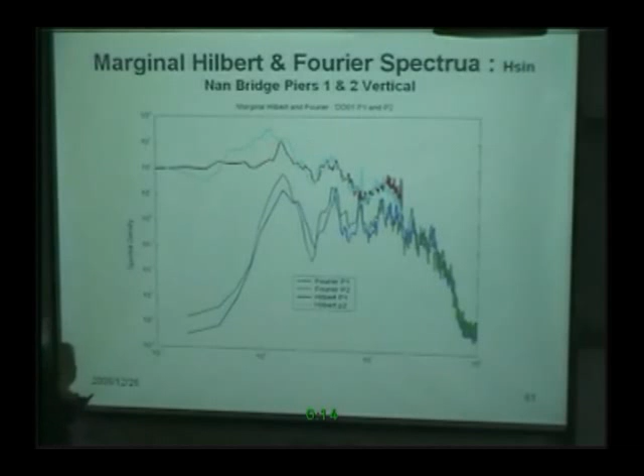And that means the stiffness of this pile is almost half of that, because 16 over 9, and 16 over 8 is an exact half. So this has almost lost half of its stiffness. Now, this of course is only one load, and we analyze all the different loads and make an average.

These are all different trucks passing by pile number 2, and these are all pile number 1. Now you will see that pile number 2 and pile number 1 are different, even in the mean. At the higher frequency the frequency is the same, but the lower frequency is different. Not only that, we can also calculate the mean of pile number 3 and pile number 4. The average of pile number 3 is over here. It's identical to pile number 1.

But pile number 2 sets really aside and is very different from pile number 1, 3, and 4. And this is averaged over many piles. If we plot it like this, say pile number 3 and pile number 4, you can see the difference. Their peaks almost line up. I have staggered the magnitude.

I have plotted this a little bit lower, and the average of all this is actually this spectrum, and this is the average. This is the mean of 3 and 4. This is pile number 1, and this is pile number 2. So the frequency shift, the frequency change is clear.

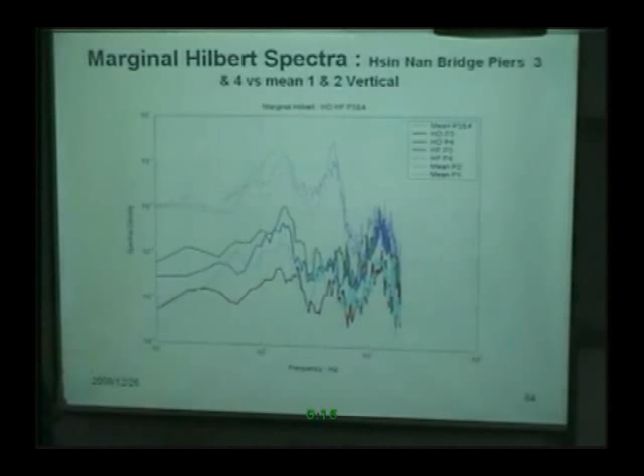And based on structural vibration theory, we know that half of its stiffness has already been lost. So it seems that the HHT can make a difference in bridge safety monitoring, and we should not rely on frequency downshift alone to determine damage, because this is very insensitive.

Nonlinear characteristics revealed under heavy load versus light load are critical. I strongly recommend that we look at this as a way to indicate whether the structure is or is not damaged. A comparison between damaged and undamaged spans is critical. For bridges, this is easy, but for buildings, it's not that easy, because a building has a lot of redundancy.

You take any building, you have so many different columns, so many different beams, and if one of the beams is damaged and you're further away from that beam, you will never see any difference at all. So, by comparison, a bridge is a much simpler, easier problem.

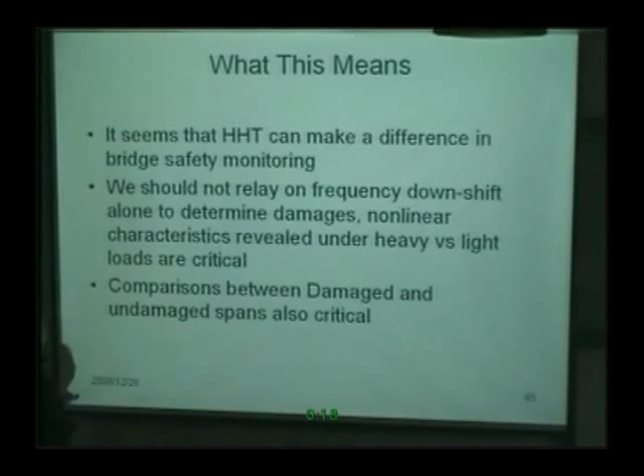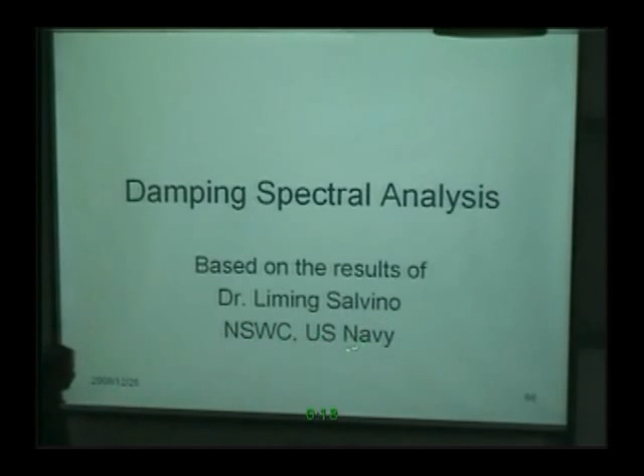Now, then we look at the damping spectral analysis. This is based on the work by my colleague Liming Salvino at the Naval Surface Warfare Center, which belongs to the U.S. Navy. What she did is try to extract the damping characteristic of a structure. The damping characteristic of the structure actually reflects the characteristic of the structure.

But in this particular application, the damping is even more important, because what they were studying was the damping of the submarine. If you have a submarine and the submarine gets hit, you want the shaking to stop right away. If the shock continues, it may damage your equipment, damage your machinery, and also cause harm to personnel.

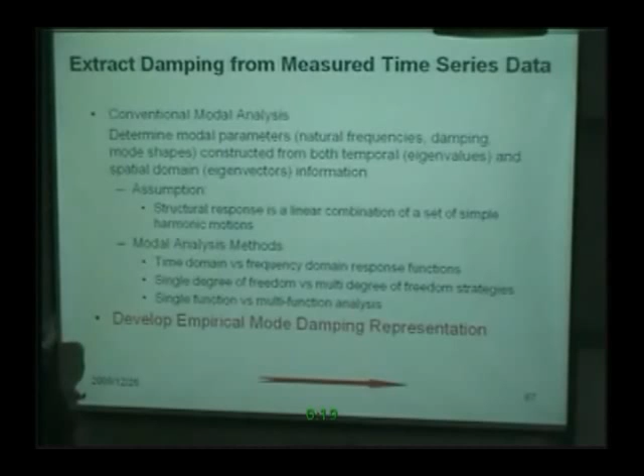So, in the past, they were using modal analysis. Modal analysis is time domain versus frequency domain, single degree of freedom, single function, and all that, linear assumption, everything. So the damping actually is computed from this mode. Each mode you can write as A times e^(iωt). But this A is a function of time. The oscillation is a function of time.

You write this A as C e^(-γt). See, this γ is actually what measures the damping. If you take the derivative of this, you find that γ is actually defined as the damping rate. That's the rate of amplitude decrease, the time derivative of amplitude over amplitude. It's the gamma. If you write out the second order ordinary differential equation to describe damping, the gamma is the damping ratio.

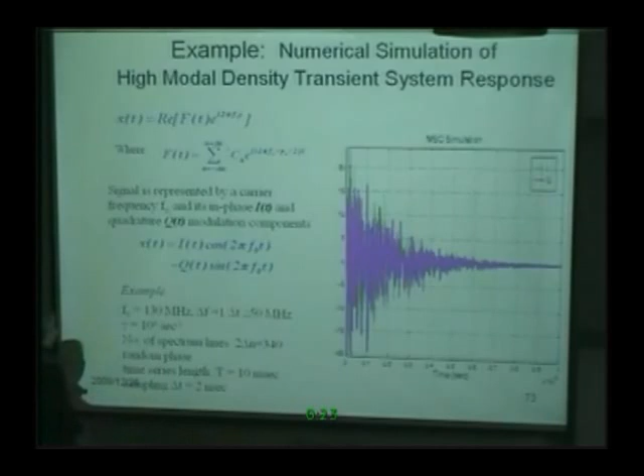Then she did the frequency change. Even with frequency change, she can again determine the damping as a function of frequency. So then finally, she did one more thing. That is assuming a random summation, a random damping. Then for a given damping characteristic, gamma, she can again get the damping characteristic. All of these are numerical computation. Then she went on and carried out a

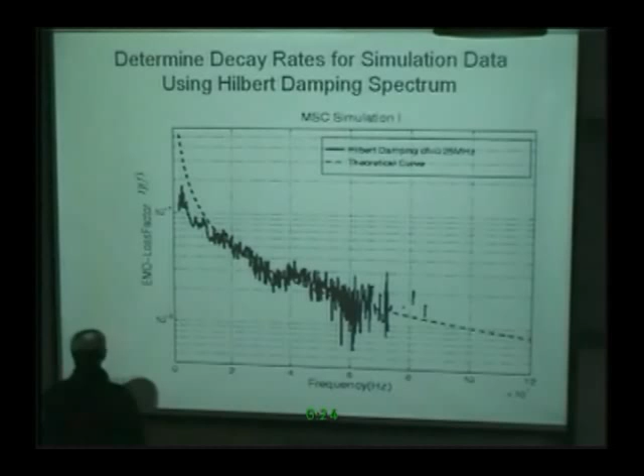test. A test is that you have a theoretical curve of damping, and you have the data. Then you use Hilbert transformation, and immediately you plot the damping as function of frequency, just one shot. Yeah, and that made her very happy. So she actually started to do this particular frame. This is an experiment frame, and this frame is interesting.

Actually, this frame is a simulation of a submarine stiffener. A submarine is a tube. Inside the submarine, you have a structure stiffened to keep the submarine hull from collapsing. And in the submarine, you want the body to be light so that you can put payload. So all these members are actually hollow. It's not solid, it's hollow. And to make the submarine damping characteristic good, so you can damp very fast, they try all kinds of ways to make the damping characteristic high.

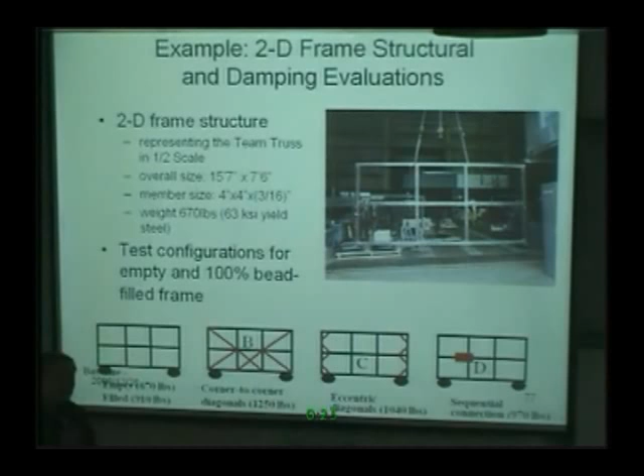And what they found is that if you use very lightweight plastic beads and put them in the hollow section of the frame, that caused the vibration to stop right away. Yeah, and the weight is minimum, and the effect is very strong. So they are trying to study the structure for two reasons. One is what kind of beads, what density of beads and how many beads you put in can increase your damping. Another one is, when you put a frame in here, what kind of bracing you have in there to make the structure stronger. So these are the two things that they want to find out.

In the past, they used modal analysis. Modal analysis means mode, because it's a linear assumption. So they tried to vibrate this structure with one single frequency and measure the response. And then you move to another frequency, you shake it, you get another damping. So finally you get a whole curve. And to do that, each vibration takes hours of preparation. To cover the whole range of frequency usually takes a week or so to finish one configuration. And then you have to change the bracing from this to this to this and to nothing, and change the different filling. Each frame will take months to finish.

What they did with HHT is very simple. This is the different kind of loading, and they decided to use the impact load. In the past, as I say, they used periodic oscillation because it's mode. But periodic oscillation has another shortcoming: in real operation, the structure is not subject to oscillatory load. Nobody will give you a force like a sine wave. The force a submarine usually receives is from a depth charge. The depth charge is the one the submarine feared the most. You throw in a bomb, it explodes underwater, and the shock wave is so strong it will actually shatter the submarine. So the depth charge is actually an impact load.

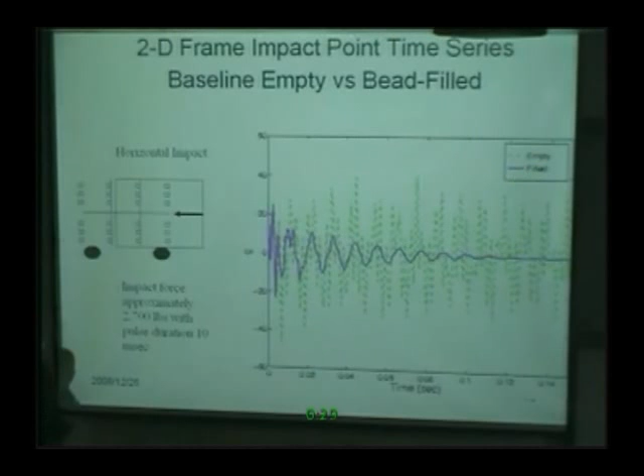and here are different kinds of bracing: the baseline bracing, the corner bracing, and the eccentric bracing. So you see the corner bracing. Which one is corner bracing? Let's see the corner bracing.

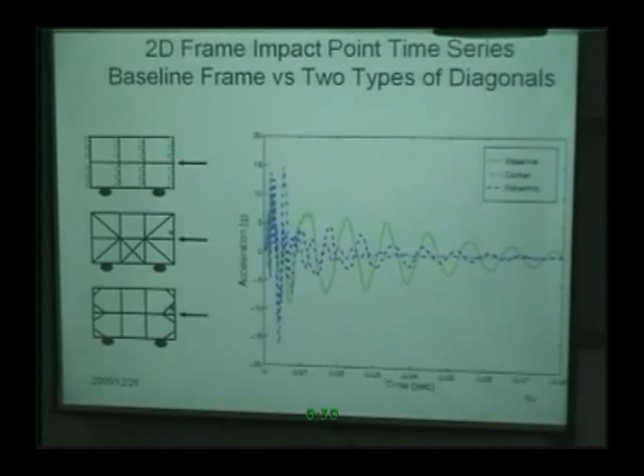So after this test, then you can plot up the Hilbert spectrum, and you can see the frequency, the energy as function of time. This is baseline. This is baseline with some bracing, and you can do all kinds of this Hilbert spectrum for different kinds of structure configuration, corner to corner, and eccentric bracing. These are function of time. This is frequency.

Then you summarize this. The previous Hilbert spectrum is just energy, but we're not looking for energy. We're looking for amplitude, A dot over A. If you plot A dot over A, what you find is this. If you spend weeks to make individual measurements, you get these dots. This is from modal analysis. You oscillate at one frequency, you get the damping at that frequency. Oscillate another frequency, one by one frequency.

This is just with one bang. You take the structure, you just bang once. It's oscillating because its impact load is a delta function. A delta function consists of almost all frequencies. And using the Hilbert transformation, you immediately get this damping characteristic. This is the damping characteristic with the filled beam, where you fill this beam with plastic.

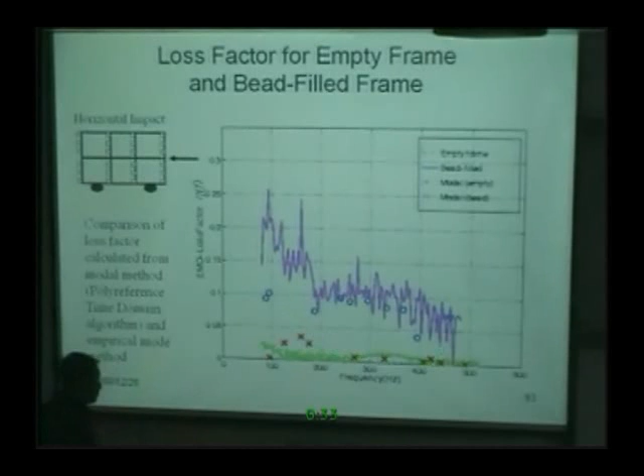So this made the Navy so happy. They actually got a patent on this test. So in the future, they will just get the structure to bang once, they get this curve, and bang another time, get another curve, and eventually they get the whole answer, instead of spending days on each individual oscillation.

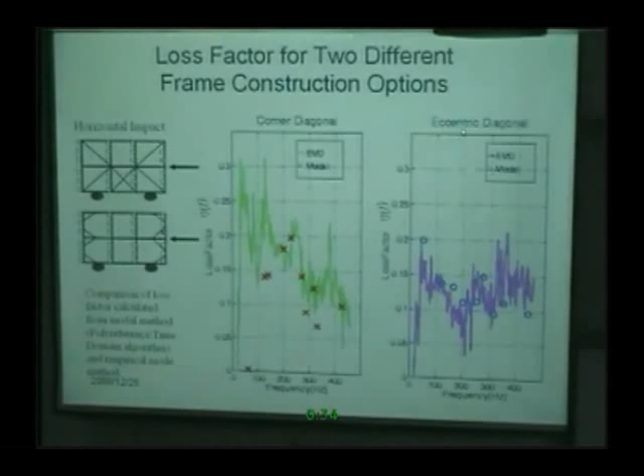And with different bracing, this is the Hilbert analysis. These are the individual ones. You can compare. This is eccentric diagonal. This is corner bracing. The individual crosses really agree very well with the Hilbert analysis. So Hilbert analysis saves so much analysis time, so much testing time. And again here, they agree so well.

I have not seen this published in any literature, but I was told this is not classified, so I talk about it. But this is a real case where the Navy feels so happy and is using this so effectively. The engineer, because of this, got a lot of extra research money to do her work.

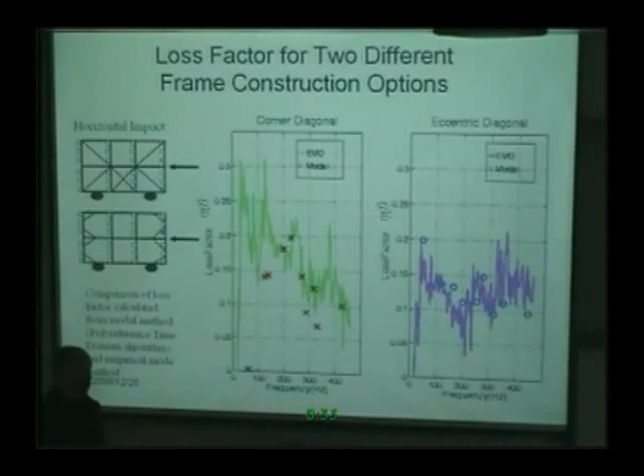So the comparison is modal analysis versus HHT. Fourier modal analysis uses a combination of sine and cosine waves to represent a complicated waveform. The oscillation is a waveform, so using sine and cosine, you have to use many terms. Damping is assessed at specific frequencies, depending on the geometry of the test specimen. Different structures have different resonance modes. So if you want to find out which mode you should avoid, you have to test many times, and you're lucky if you hit the particular frequency.

The most critical thing is this works well only for linear simple systems. But for Hilbert, we use a simple intrinsic mode function, which is AM and FM, each corresponding to a different carrier frequency, and the AM immediately gives you the amplitude. So this is designed almost perfectly for damping, and damping assessment over a continuous range of frequencies. You bang once, you get all the frequencies that you need.

This is especially important if the damping varies with different frequency. For example, resonance. The linearity condition is not imposed. They can be used to measure shock wave, especially when damping is dependent on both time and frequency. Shock is what they really want.

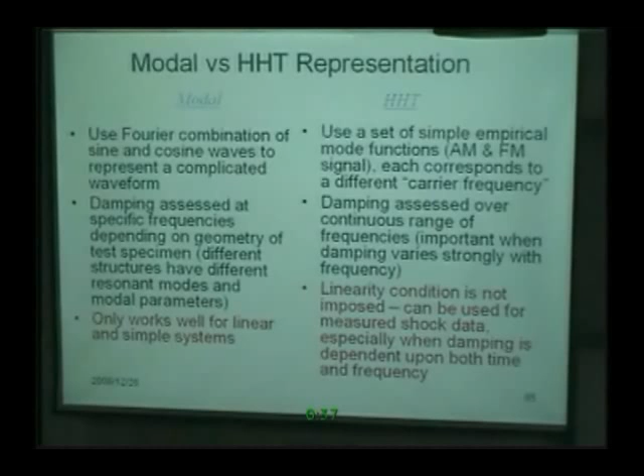Okay. So the summary is that this HHT method gives a detailed local structure response behavior, and it's a unique, valid, and important approach to shock data analysis. This is our summary. Advantage of this method is effective use of full complicated data in time-frequency combination. And the method also fully explores the physical significance of the IMF component, and may offer new physical insight. And this is especially for the shock impact and for identifying important structural failure mechanisms of large and complicated structures.

Our work of time-frequency dependent damping is the only method that's able to extract damping value from experimental study of complex systems such as underwater shock testing time series, and express damping ratio as a function of both frequency and time. And this actually solves a pretty big problem for the Navy.

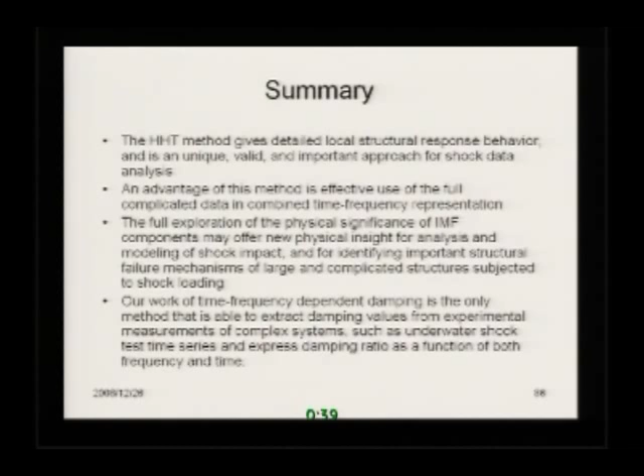The Naval Surface Warfare Center means they're interested in warfare. This is also true not only for submarines but also for surface vessels. If a surface vessel gets hit by a bomb or by a gun, the ship oscillates, vibrates too, and they want the vibration to be as minimum as possible. So all kinds of naval vessels are subject to these tests, and this now may become their standard test that the Navy uses.

Okay, so the damping spectrum analysis is important for non-destructive examination experiments. Damping is only limited to stable structure vibration. When you talk about damping, especially the formula that you saw, the damping A dot over A, that means amplitude change is squared. If the value is positive or negative, doesn't matter, it's squared, all becomes positive numbers. Now when the structure is unstable, there might be negative damping. If the oscillation actually picks up and gets bigger and bigger, this does not work.

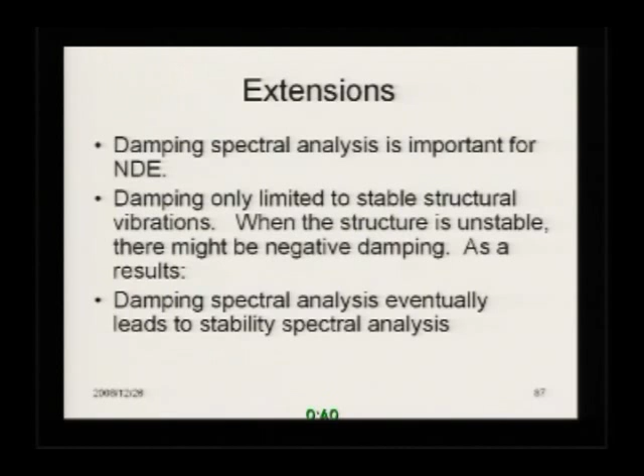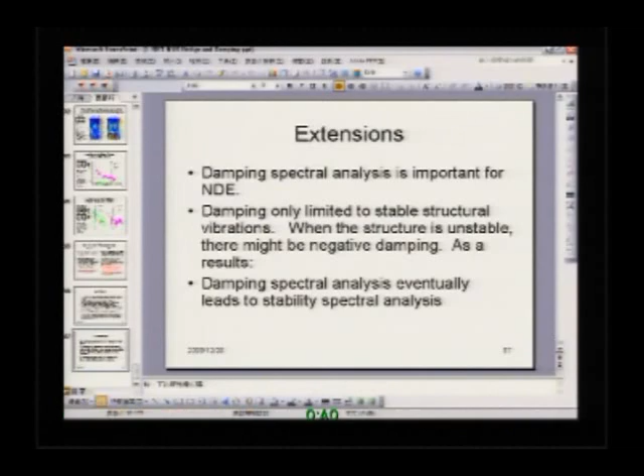So the damping spectral analysis eventually leads to stability spectral analysis. The stability is very different from simply damping. Now next, I'm going to talk about stability. Application. Stability.

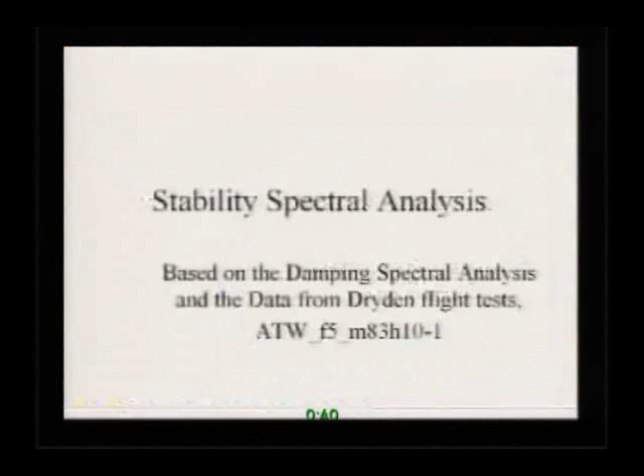Okay. After the Navy people did the analysis for the submarine and the surface vessel, I was asked by NASA to visit the NASA center in the Mojave Desert, Dryden Flight Center. Most people have seen this place as a test place for new cars. So this whole area is a desert.

It's a lake bed. In the raining season, you cannot see the end of the lake, but you can walk all the way across because the deepest the water is about 2 feet. It's so flat that the water just fills the whole place, miles on end. But when it's dry, the lake bed is so flat that you can drive anywhere without any problem. So most of the airplane tests and vehicle tests are conducted here because there's no obstruction. You can keep driving, and the lake bed is so hard, so it's a perfect place for that.

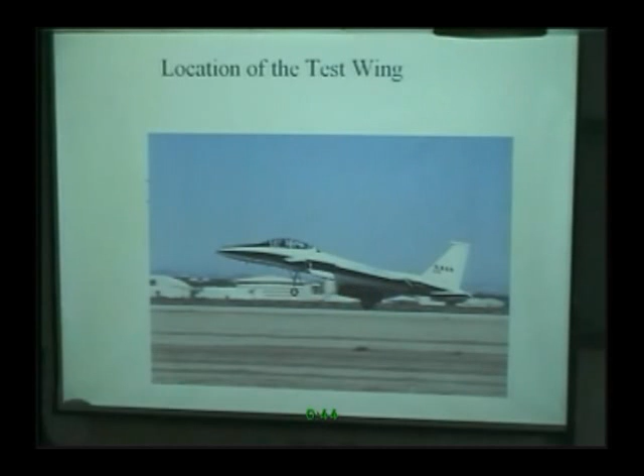So for this particular test, they go to Dryden, because Dryden doesn't have any wind tunnel, but Dryden has a fleet of airplanes. Whatever we want to test, we just hook it on the airplane, let the airplane fly, and test under flying conditions. What is the specimen here? This is the fuselage of the aircraft. This black box contains all the equipment, instruments. And the test specimen is here. It's this little thing, about 3 feet wide. It's an airplane wing.

Why do you want to test this airplane wing? This airplane wing is supposedly for the next generation of aircraft. The next generation of aircraft has a special requirement, a special concept. That is, in our present aircraft, the wings are designed to be rigid. So after takeoff, the wing does not deform. Of course, it flutters, but it will not deform.

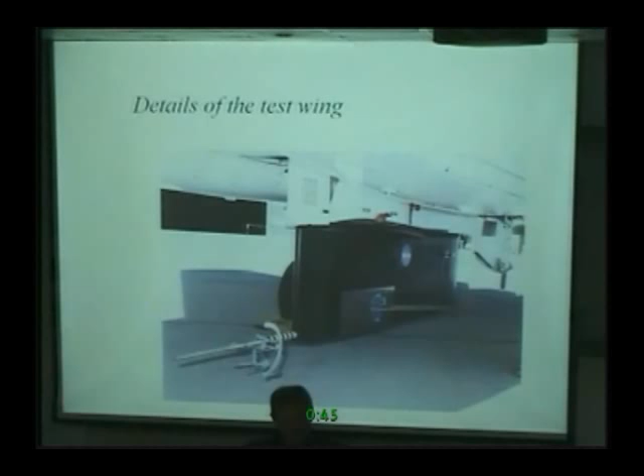This wing is designed so soft, so flexible. When the aircraft flies at top speed, the wing actually deforms, swings back. And by swinging back, it actually improves the performance of the wing. And also, by design, the wing is so flexible, so it's lighter, so the total weight of the aircraft is less. So by having less weight and better performance, they thought that would be a perfect solution to design the next

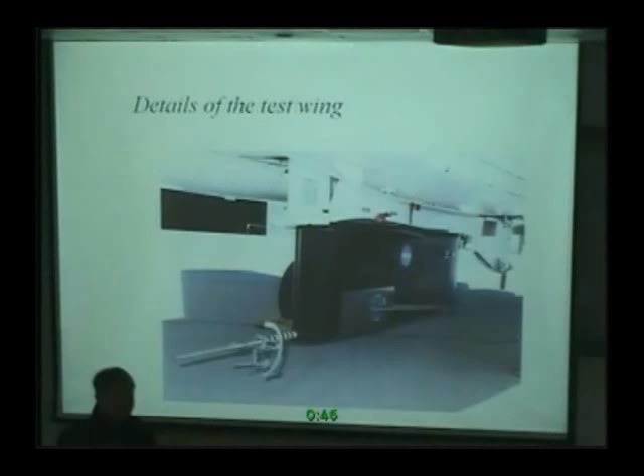generation of high-performance aircraft. But the problem is that if I design the wing so flexible, will the wing actually be shattered when you fly? So they want to test that. And this experiment was going on for 5 years when I first got there. The first flights are at different speeds, and the final experiment was to test the safety envelope of this. They will fly until it shatters.

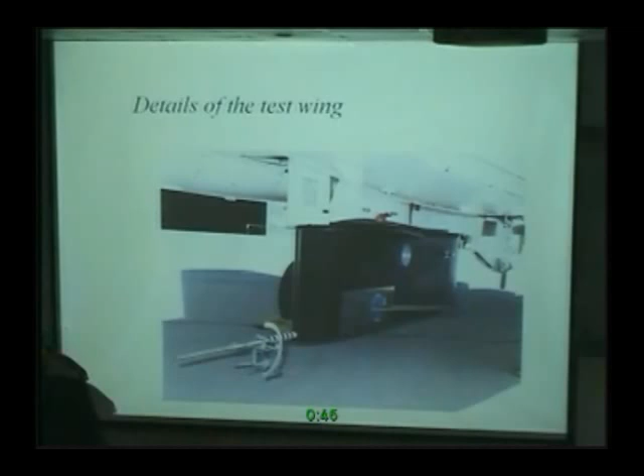Okay. Let me see whether the video doesn't work. Let me see if it's because you don't have the video. Huh? Do you have the video? Yes, next time you repeat this. Okay. The video is nice to watch. So I want to. You sure you have the video?

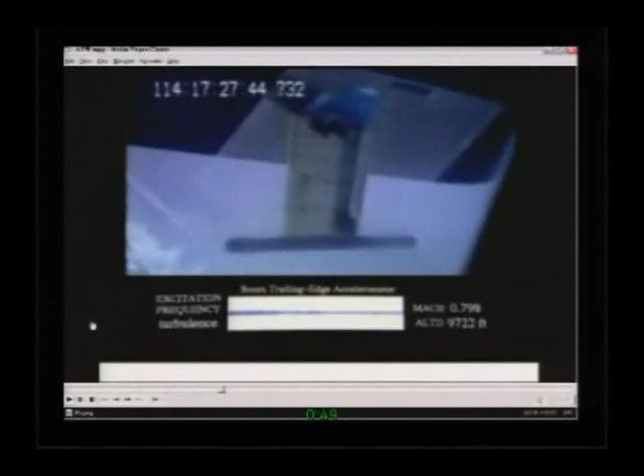Okay, this is the wing, this is the Mach number, this is the altitude, and this actually says you are clear to accelerate. Accelerate to 85 means the Mach number to 0.85. This is the oscillation, and the sensor is put in here. See the oscillation? The oscillation is getting bigger and bigger like that. Okay, all right, once more.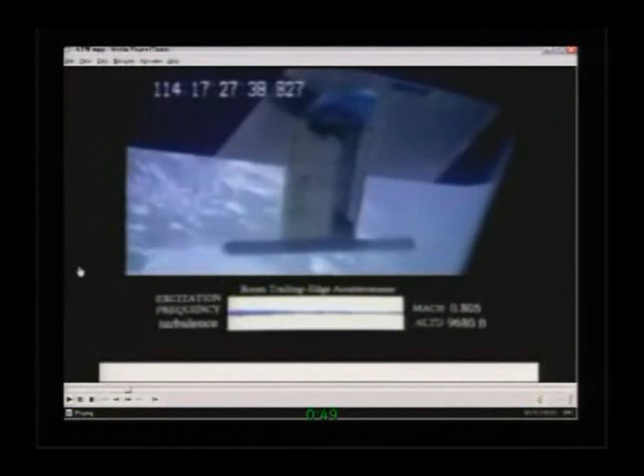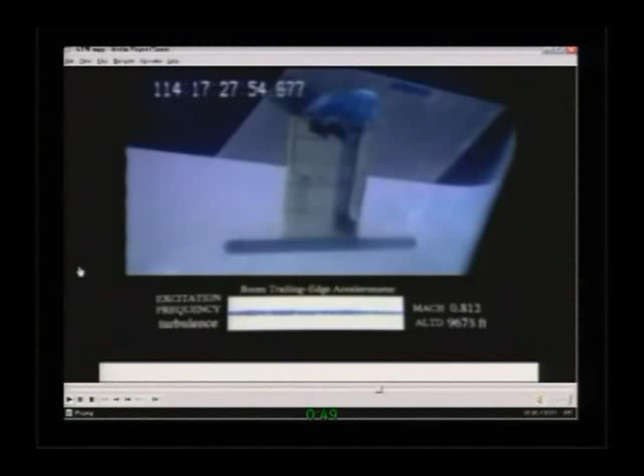This is the vibration signal. Okay. When they say terminate, it means they want to stop, but you cannot stop the airplane. So the wing was shattered. Oh, thank you.

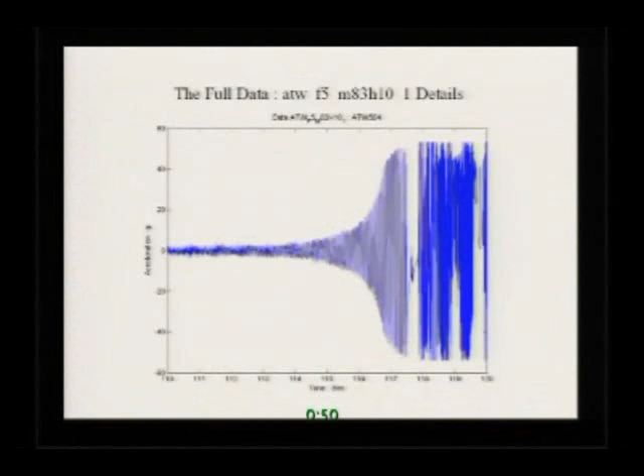The data you got looks like this. After this point, this data is useless because the wing and the sensors are already gone. So whatever you collect here is totally useless. And actually, this data reminds me of the data I saw from the Challenger after it exploded; they recovered some black box and gave me data. It looks exactly like this. It means it's already disintegrated and the sensor is somehow still taking data. The useful data are here.

So this is the kind of data they collect, and obviously this is non-stationary. But at that time they didn't have any other way, so they used wavelet, they used Fourier, and they analyzed this data and didn't get anything. And finally, I showed them the Hilbert spectrum, and we wrote a paper which appears in the AIAA journal.

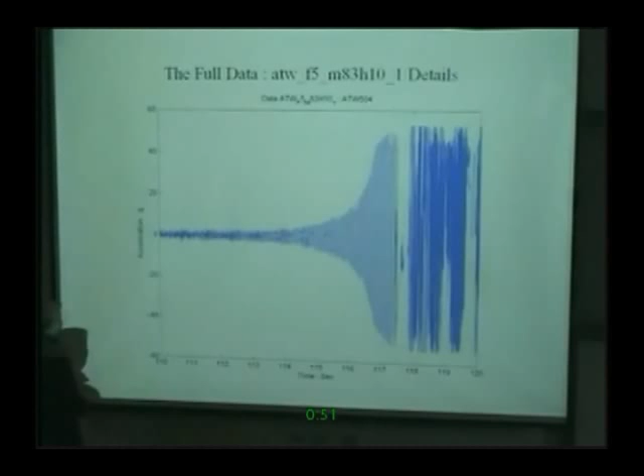So this is the data, and when you decompose this data, you find that it is so good. This component is 0 to 500. This component is 0 to 0.4. This is the main information. All the others, 25 compared to 500, it's nothing. Most of these are more like noise. And after this 0 to 500, this is from 0 to 10, and all the others are so small.

So even if you look at these values, 0.5, 0.4, none of that has any important consequences. If we use the summation of 1 to 7, it's from here to here. If we sum that up, you see the spectrum is perfectly flat. And perfectly flat means it's white noise. It's not going to be informative.

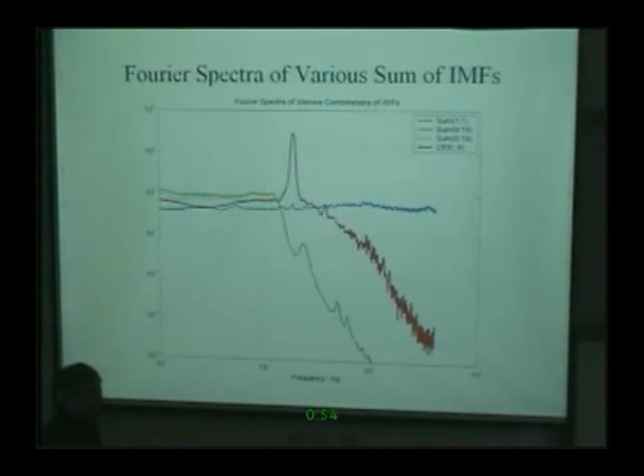And if you plot it up, this is the original data from beginning to end. Okay, and if you take away the noise, it is this. This is the noise, I'm sorry. This is the noise. The noise is getting bigger and bigger. Noise can come from all kinds of sources: the vibration of the aircraft, the turbulence of the air and all that. But nevertheless, all of this ends up as a flat spectrum. So it is no information.

If I take this away from that, I get this. This is the kind of data, Hilbert filtered data. This is the data that I want to look at. So first, I clean up the data by throwing away the useless information. Once I get this, then I ask myself, what is the sampling frequency? They really want to sample this carefully. They sample the vibration at 800 hertz. So each second they take 800 data.

Now let's look at something interesting. That is, if I plot a Hilbert spectrum, I immediately see that I have a lot of almost white space, but I have a very narrow energy concentration over here. The energy concentration is around, this is 0, this is 30, around 20 hertz. So I do see energy over there at 20 hertz. It's very, very important. And if I zoom in to look at the 20 hertz, instead of looking from a very large range,

what I see is the frequencies oscillate all over the place. I cannot see anything useful. I cannot see any concentration of energy here. And by comparison, if I use Fourier, I see a very nice concentration of energy. It's much better than Hilbert spectrum, in fact. Not only that, Fourier also shows frequency harmonics. Yeah, this is a spectrogram, by the way, a spectrogram from 512 data points. Yeah, less than 1 second.

So from Fourier, I know toward the end, the behavior is highly nonlinear. And the frequency is right over here, the energy concentration is here, and this energy concentration is much better than Hilbert. And if you look at the zoom in, you find that the energy concentration is much more clear than Hilbert. Then why should I use Hilbert? The Hilbert is useless. Yeah, this happened many times.

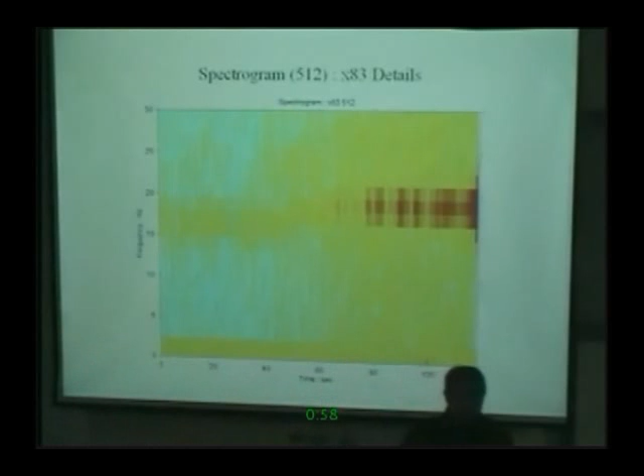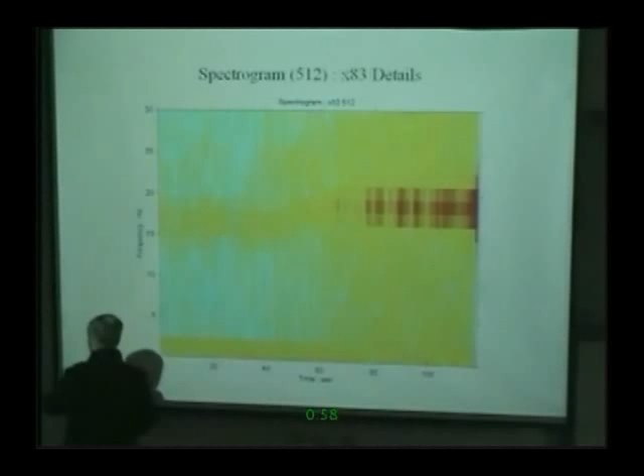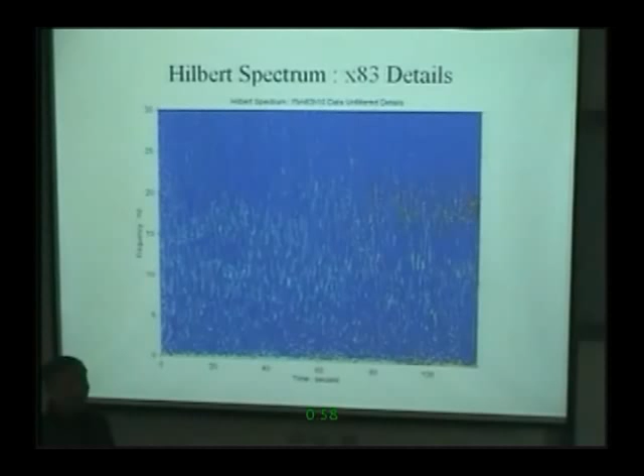The reason that I say it happened many times is that I told people that if you use Hilbert transformation, you should take a higher data rate. You take more data. But if you use every point of the data, you end up with the frequency so diffused. So people come back and ask me, say, I followed your advice to take lots of data. Look at what I got. Nothing. No information. Okay. So what should one do? This is to filter the data. It's even better after I throw away the noise. This is very, very clear Fourier analysis.

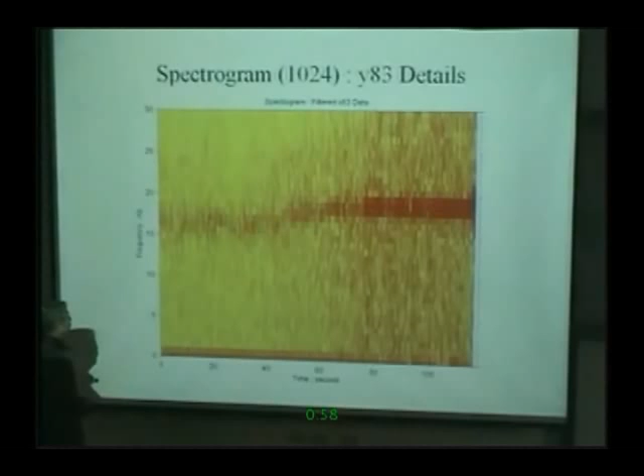So after that, I decide to downsample. Downsample means that I take the data, I do not use every point. I take 1 point, I skip 8 points. So I reduce my sample to 100 hertz. Yeah. So if I reduce my sample to 100 hertz, I will get 8 sets of data. Each set looks like this.

So if I plot the 8 sets, it still shows the oscillation okay. It may have a little bit of detailed difference, this wave versus that wave. Yeah. But nevertheless, the basic frequency is still there. The basic frequency is what I want, right? Therefore, this downsample is useful to me.

Then a very critical point here is, should I downsample right away once I collect the data? The answer is no. If you downsample with your raw data, what happens is that the white noise will come in. You will never get very clean data. So you first throw away the noise and then downsample. So the noise only gives you perturbation in here. It will not give you any information. So you first filter it, throw away the high frequency, and collect the clean data.

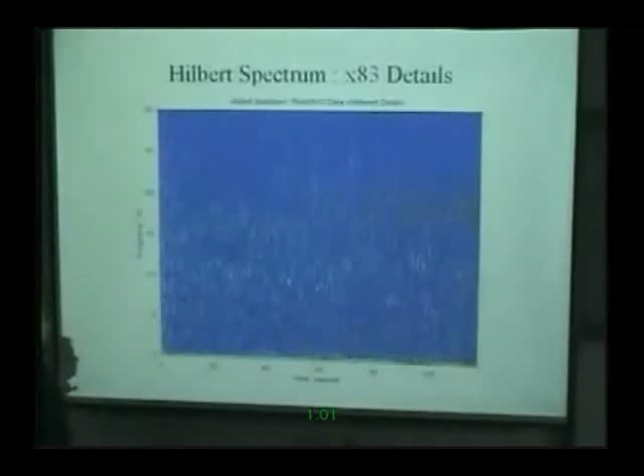Now you see that the energy gets bigger and smaller, larger and smaller, eventually gets very, very large, and then the frequency decreases. This is what you really want. And also, there is low frequency energy that actually creeps up and becomes very high. And compare this with that, you will see the difference is so big. This, you cannot see anything.

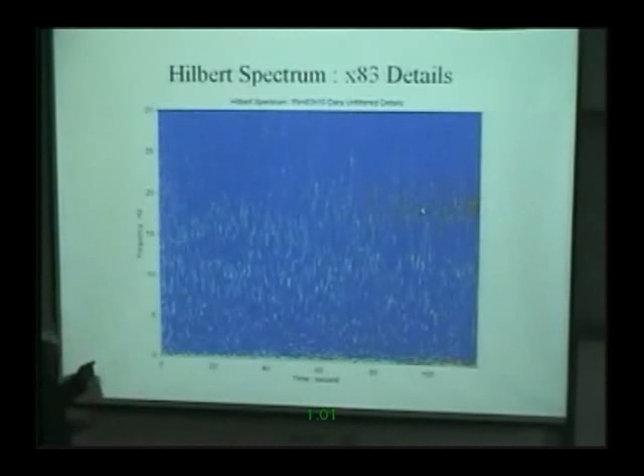Why can you not see anything? Because you take a derivative of the phase, and any small change will give you a large frequency deviation. The answer will never actually concentrate in the range that you would want. So this downsampled data is really useful. This is the filtered, downsampled mean Hilbert spectrum.

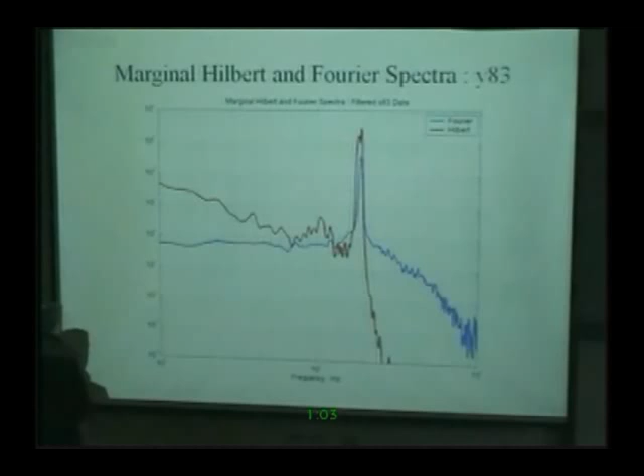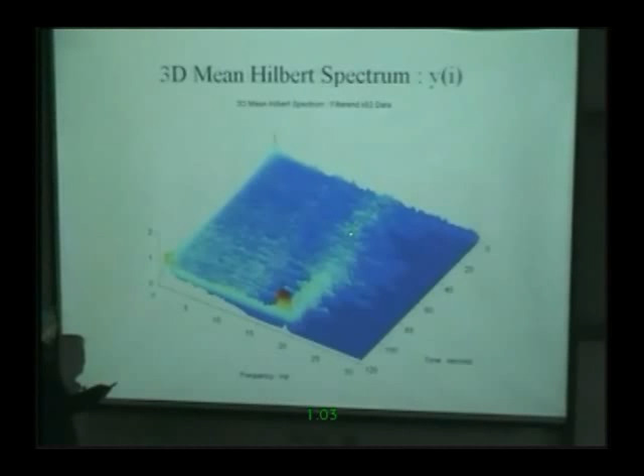And you can plot this spectrum up. You see that this is where the highest energy is, as a function of time. The energy actually moves from here eventually to this. And this energy, originally here and eventually coming up to here, is what they call stress stiffening. You apply a little bit of stress, and the material becomes stiffer. And as the material becomes stiffer, the frequency jumps up. This is the first reaction of the material.

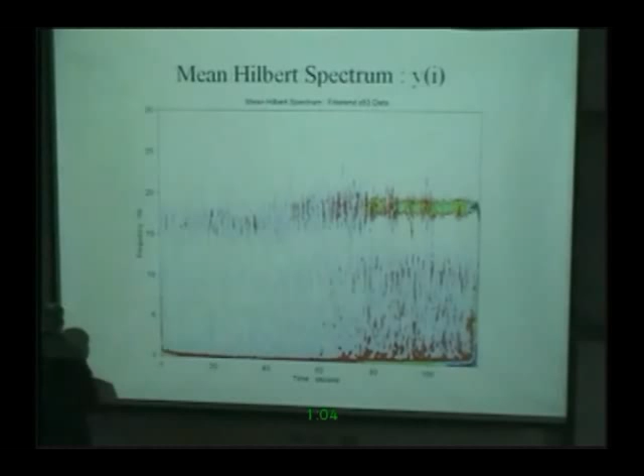Once you apply load, the structure becomes stiffer. And when you apply load, by the time it yields, the frequency actually decreases. That's just before the collapse or the shattering. A different view of this is the spectrogram. If you look at this and compare it to the spectrogram, they look about the same.

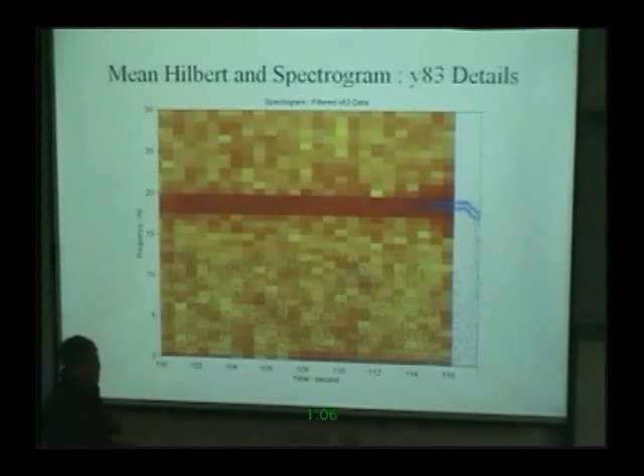And what happens at the blow up is that the frequency is almost constant, and by this time it suddenly decreases. And Fourier never actually captured this part. The whole thing they wanted to study, they did all this study, was to try to capture how it failed.

What does that mean? That means the wing originally starts to flutter, and the flutter amplitude keeps increasing. By this time, it yields. It yields means that, just like when you bend metal, before it breaks, the strength gives away. And when the strength gives away, when you bend, it offers no resistance. As it offers no resistance, the frequency decreases. So as the wing loses resistance, the frequency starts to decrease.

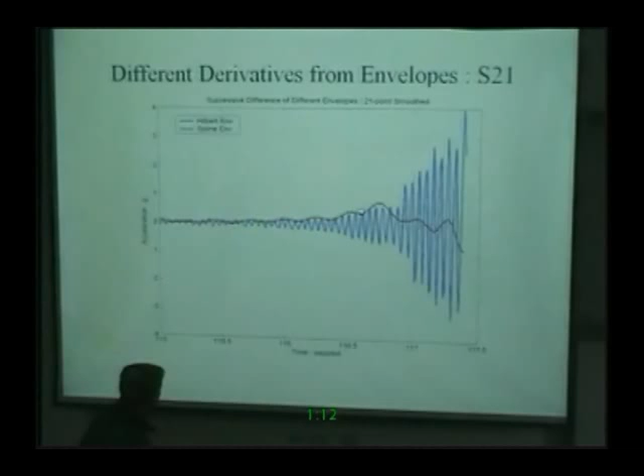21-point smooth. Even after a 21-point smooth, you have to notice the scale. Here is 60, here is 15, here is 4. So after you use a 21-point average, the Hilbert amplitude still fluctuates quite a bit, but the spline derivative is already very well behaved. And this is another thing that we find: the spline amplitude is important. It's not only important here, but also in normalizing the signal when we compute instantaneous frequency.

In other words, you have a signal, say an IMF. You still cannot immediately compute the instantaneous frequency. You have to smooth it. You have to separate the signal into AM and FM, and you can only compute the instantaneous frequency on the FM part, separated from the AM part. And this is the AM part. That is critical in applying the Hilbert transform. I have encountered many people asking me why it doesn't work, because they did not separate AM and FM correctly.

For the AM and FM parts, unfortunately, you cannot use the nice Fourier-based Hilbert transformation. You have to use the spline separation that I propose. All of this, next time I will give you a summary. All of this indicates that this whole method that I'm advocating, that I'm trying to give you, actually works. But it defies mathematicians' rigorous definition.

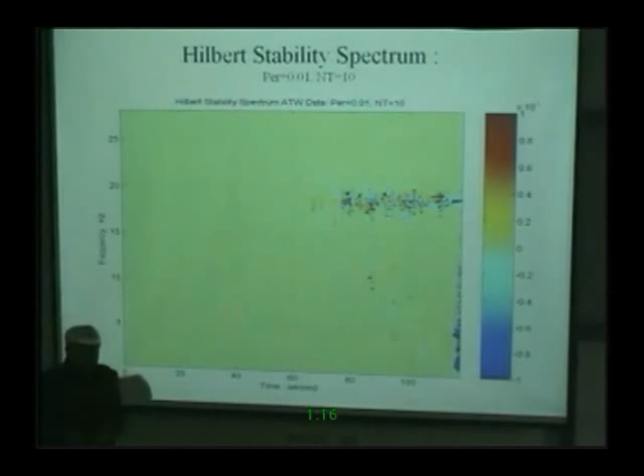Okay, so this is 1,000th, and this is 10 time step average. And if I use 5 parts per thousand, look how clean it becomes. And if I use 1 part per thousand, look at it, even cleaner. And this is 1%. 1%, that means I cut off anything less than 1% of the amplitude.

And I can cut off even more, 10%. Then all I have is this. That means the instability only occurs at the last minute. And this is a very reasonable answer. So if you want to study a problem, then you have to go through a number of steps. At each step you see the physics, you see the value, and what it costs the effort to fill.

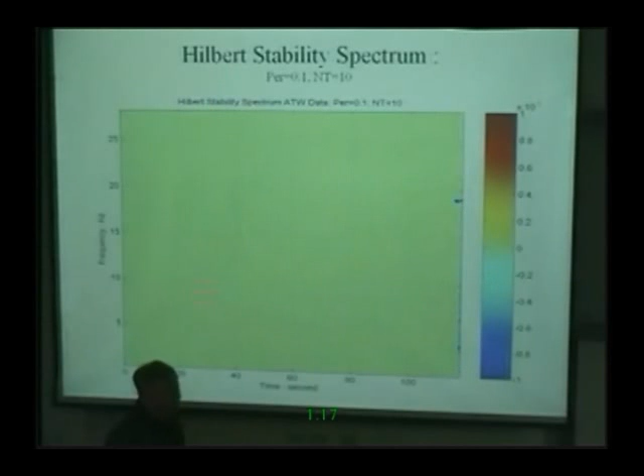It actually happens all at the last moment. Previously, the flutter may go bigger and smaller, but that does not imply unstable. The real instability is right at the bitter end. So this percentage is important.

Here we hold the time step average constant, and if you use percentage of 0.1, 0.01, 0.001, you see the amplitude contribution as a function of frequency. You see 0.1 is here, and 0.001 is here. So if you take too small an amplitude, what you will experience is a lot of these frequencies all come in because of the small amplitude.

And if you plot this as time, the business end is over here. This is plotted as frequency. The very low frequency is the important one, and this is plotted as time. The very critical period is the last seconds. So in this way, you look at different frequencies, you look at different times, you identify your problem. The problem all happens over here.

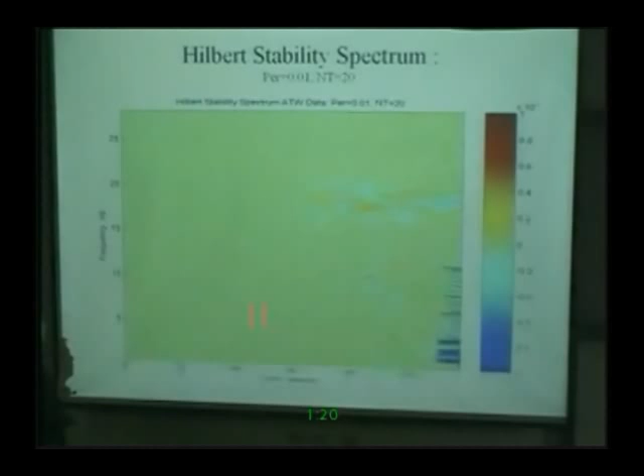So these actually are positive, these are negative. That means this area in general, other than these few spots, is stable. And when you come to here, it becomes unstable, mostly unstable. And with even longer, you see the time average spread out.

This is plotted as a time average. You see the more you average, the smoother, of course, the answer will be. And as a function of time, again, the important phenomenon is toward the end. All over here, nothing much happened.

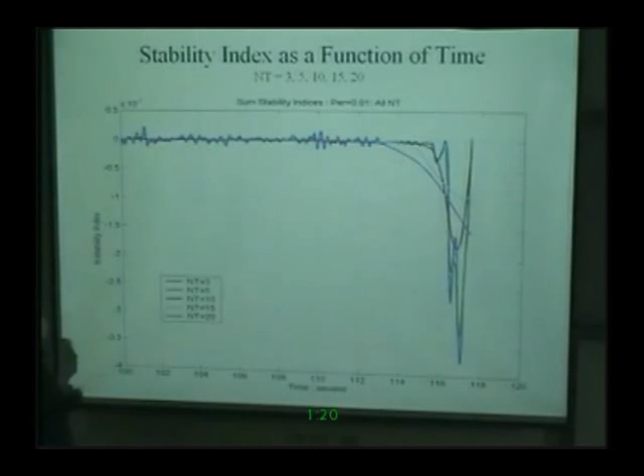Here, it becomes highly nonlinear, and then it starts to yield. And once it starts to yield, the linearity is not an issue anymore. So this is the big critical point. And if we stop at this point, then we can save the amplitude from decreasing.

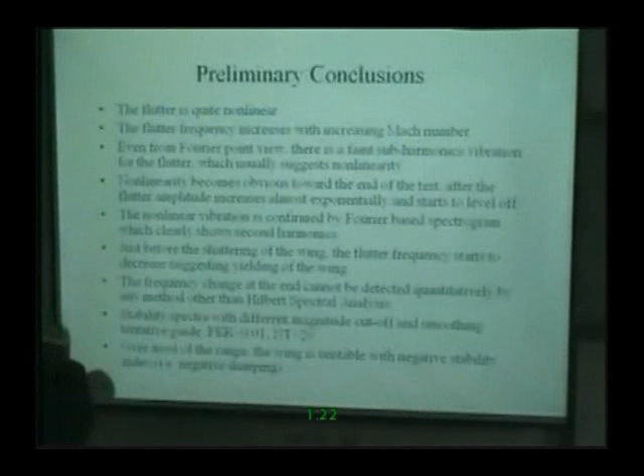So here's our conclusion. The conclusion is that the flutter is quite nonlinear. It's nonlinear from beginning to end, not just at any particular instance. And the flutter frequency increases with increasing Mach number. That means as our airplane speed increases, as you see, the load is increasing. As the load increases, the structure has stress stiffening.

Even from the Fourier point of view, there's a faint subharmonic vibration, which suggests nonlinearity. When you look at the Fourier spectrum, you see a lot of harmonics. The harmonics indicate that the waveform is already distorted, and distortion of the waveform suggests nonlinearity. So we know that they are nonlinear. Nonlinearity becomes obvious toward the end of the test, especially after the flutter starts increasing.

The nonlinear vibration is confirmed by the Fourier-based spectrum, which shows second harmonics, and just before the shatter of the wing, the flutter frequency starts to decrease. Decrease means the wing actually starts to yield. The frequency change at the end cannot be detected quantitatively by any other method than the Hilbert spectral analysis.

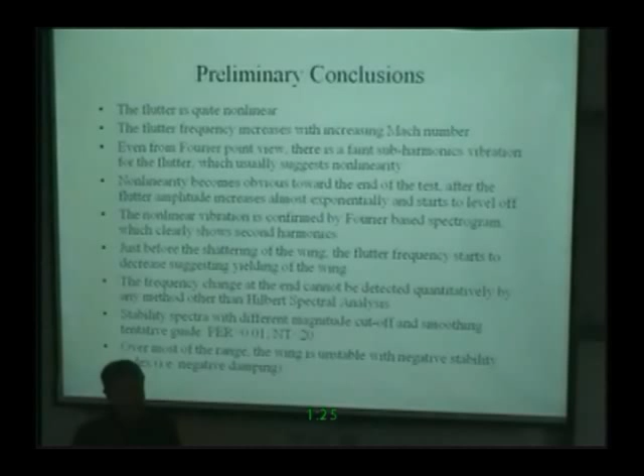The last one is that over most of the range, the wing actually is unstable with a negative stability index. That means negative damping. So this is important. In the past, most civil engineers used damping to characterize a building or structure. They only worry about positive damping. The reason they get positive damping, however, is that in their derivation even negative is counted as positive because they square it. If A dot over A is negative, they square it, it becomes positive. So in their calculation, lots of instability is actually counted as stability, as damping. So you have to be very, very careful.

Because of this study, we not only published a paper, we also have a patent on this: stability spectrum analysis. Right now it's not a standard tool. So what I did with the data is I looked at the data with various parameters. I explored the magnitude cutoff. I explored the averaging in time. So eventually, I got a very clear sense of what's going on, and I finally identified that the instability actually occurred toward the end. That's how I gave them the quantitative answer.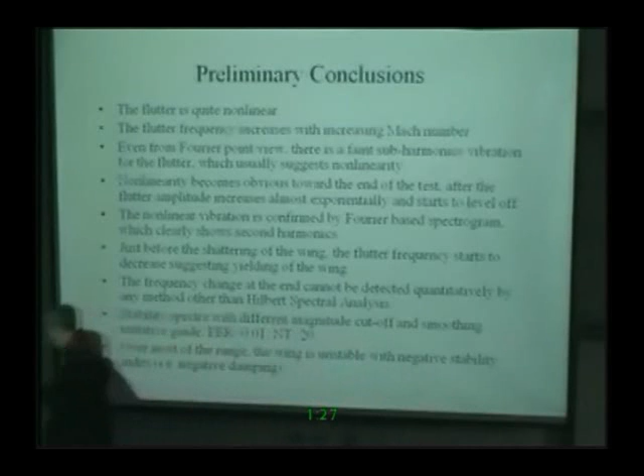So Dryden was very happy with this analysis, and after that, they asked me to go over there to give them a short course on this. I don't know whether they are still using it or not, but I think if they are going to analyze future experiments, this tool is probably going to be very helpful to them. Okay. I think this is the end of the stability. That's the end of this.

So we only have one more lecture to go. Next time we meet, I will give you a wrap-up of all we discussed, summarize the effort of the whole semester, and maybe become a little bit philosophical about the methodology. Okay. All right. Thank you very much. Any questions? No? Yeah. I want to go back to...

Okay. Mm-hmm. There should be two states. One is forced vibration by the truck, and another is free vibration due to the initial displacement. How can we figure out these two states from this figure?

No, I cannot. But most of the vibration, however, is actually free vibration. The forcing, see, you put the sensor right on top of the pile, right over here, okay? So the truck was passing by, the direct load in a very short period. It's probably just that little period. However, even before the truck gets on this, it starts to vibrate already, okay?

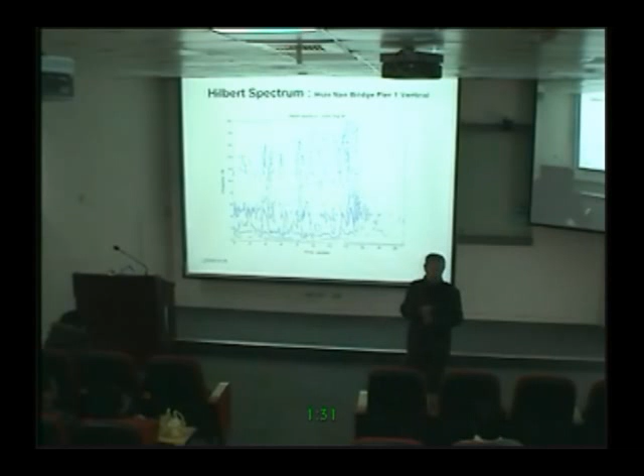Yeah. If you are interested in that problem, I suggest a book you may want to read. Professor Yang has a book called Truck and Bridge Interaction, or Truck Rail Interaction. It's available. Another question? Sure.

Because you say that the two frequencies are from the pile, if we take these two IMFs out, can we identify the crack of the pile from the modulation of amplitude or the frequency? If we take this particular frequency component out, you'll find that this pile oscillates at say 1.6 hertz. The other pile oscillates at 1.2 hertz. The difference is the other pile has already been exposed. So it's not the crack, it's the foundation that's exposed.

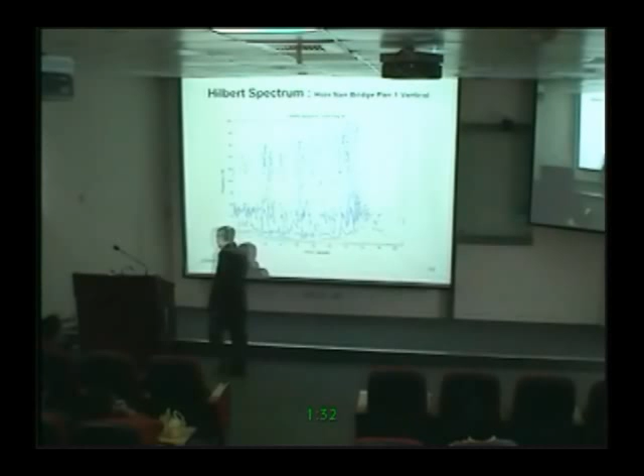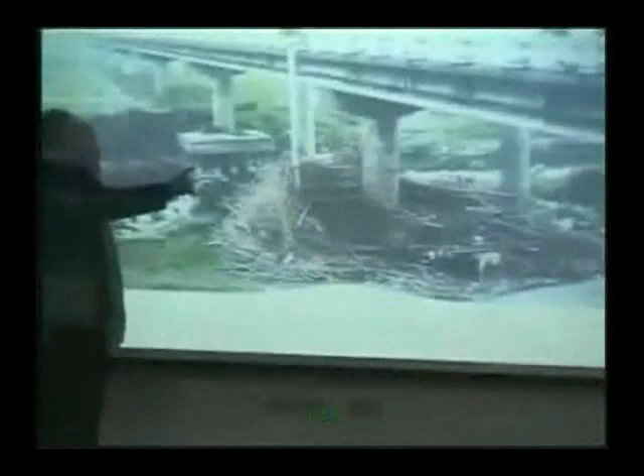Remember at the beginning of the class, this is the pile we talked about. This is pile number 2. Yeah, this is pile number 1. See, this pile, we put the sensor here. This pile is all exposed, and because it's exposed, it's so wobbly.

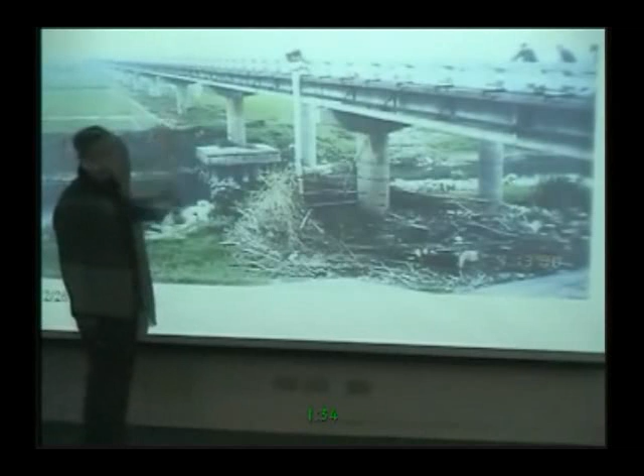And we compare this pile with all the other piles. Their frequencies are the same. And not only are the frequencies the same, the two peaks are all the same. Remember, we plot the particular frequency. No matter what kind of car passes by, the frequency doesn't change, except this one. Now, this is pile number 2.

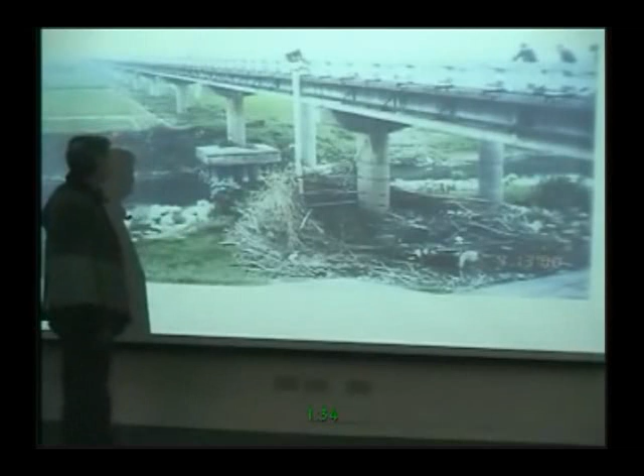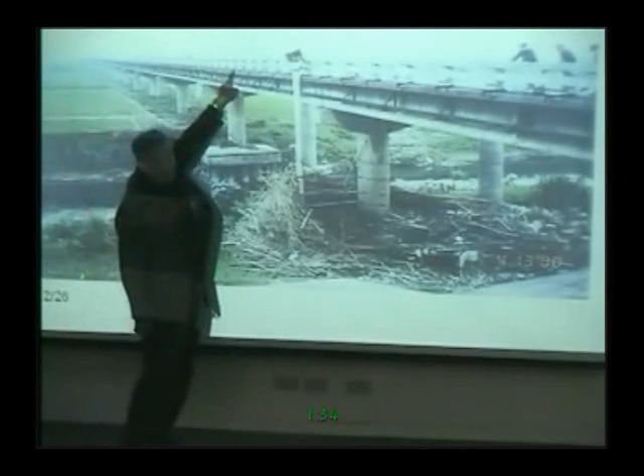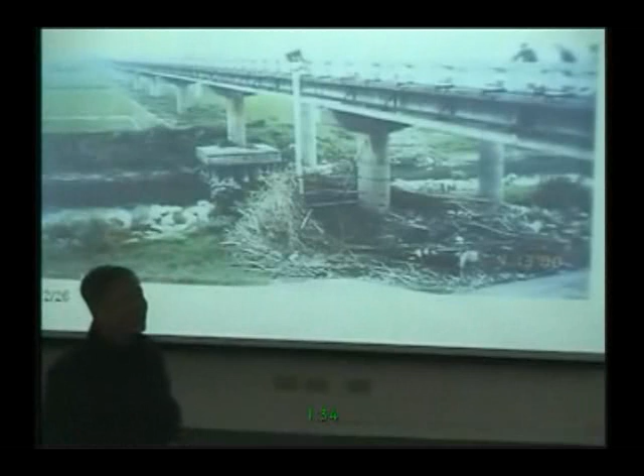Yeah. We even tried to put a sensor on here. We didn't get anything meaningful. So actually the data we got is from here, outside the rail, but on top of the pile. Yeah. Okay. Yeah. Sure.

No. No. You downsample the cleaned-up data. The reason that you don't want to downsample the raw data is the raw data has high frequency noise, right? And the amplitude of the high frequency noise is not small.

Okay. This is raw data. This is the cleaned data. So if you do not clean first and you start to downsample, one point may be here. The other point may be here. So as a result, because the noise is so big, and the noise frequency is so high, you'll never be sure where you got your point.

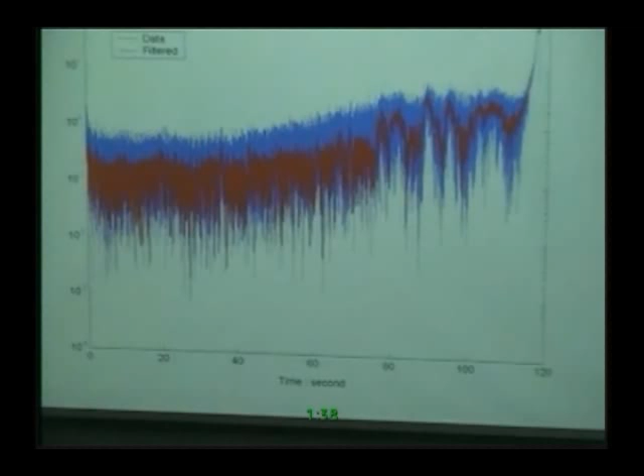Look at this. This is your clean signal. Look at how large the fluctuation is that you could get. And the noise, as we demonstrated, is white. So it does not give you any more information, even if you include it. Okay? All right. Any more questions? No?